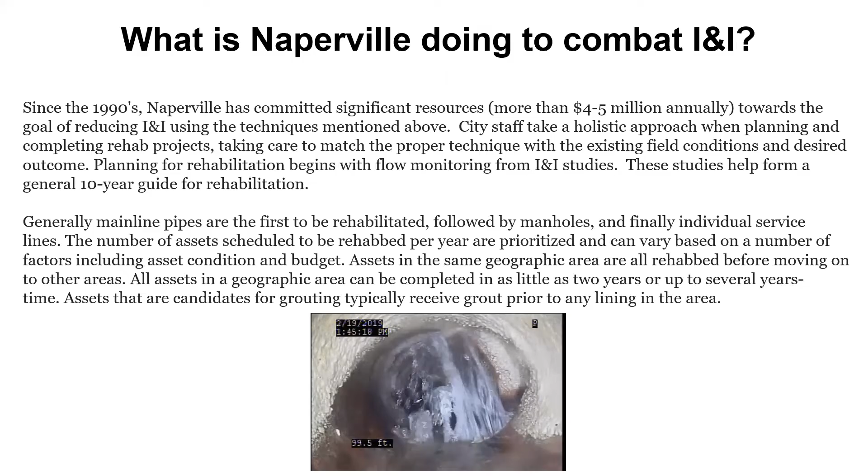From sanitary smoke testing, dye flooding, to MSI inspections - which MSI inspections is multi-sensor inspections on large sewer lines. Multi-sense meaning it uses CCTV, but it also uses sonar and laser LiDAR technologies to do a full inspection of the sanitary sewer line, including what debris is under the water flow. The laser measures the actual thickness of the pipe compared to what it was originally installed to what it is now. So we have an annual program that we do that on all of our trunk sewers.

And the one that we have the best success with, and I can't say enough about this program, is saturated ground inspections, where we actually go out and inspect our sewer mains, our manholes, and our laterals during saturated ground conditions. We found out this works out best for doing any sanitary sewer inspections because you're actually seeing what the sewer system is doing in real time.

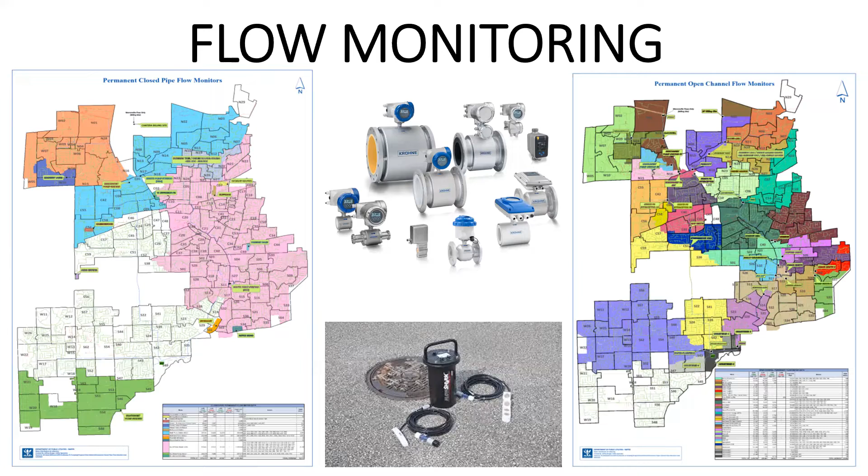The way it's worked, if you notice on both of these maps, each area is broken down into flow basins, and the flow basins are recorded in linear feet and acreage. This data is given to our flow monitoring data analysis company, and they use all of this data and our GIS tables to calculate rain derived I&I, or RDII.

We have a large network of SSO alarms, and the reason we have a large network of SSO alarms is that this helps us react to flooding quickly. There's 18 SSO alarms all over the collection system in low-lying areas or areas that we've known have issues in the past. This will help us react quicker to prevent any SSO overflows and help prevent basement backups - meaning we can get out there and bypass pump faster, or if there's something else going on in the system other than the rain, and it helps with our investigations also.

Tony, for those of us who are not working with the wastewater group, could you just describe what an SSO is? Oh, yes, of course, my bad.

The SSO alarm is a sanitary sewer overflow. And every sanitary sewer overflow actually needs to be recorded to the IEPA. So these alarms, these devices are level alarms that monitor just the level of wastewater in a trunk sewer and our interceptor. We have these alarms set up for the sanitary sewer overflows at different elevations. They'll tell us if the water gets to the crown of the pipe, that's when we start reacting. If the water continues to increase, we'll have a second alarm that's called a high alarm, kind of generic. But that's the point where we really need to start regrouping and figuring out what we're going to do to prevent any SSO, or sanitary sewer overflow.

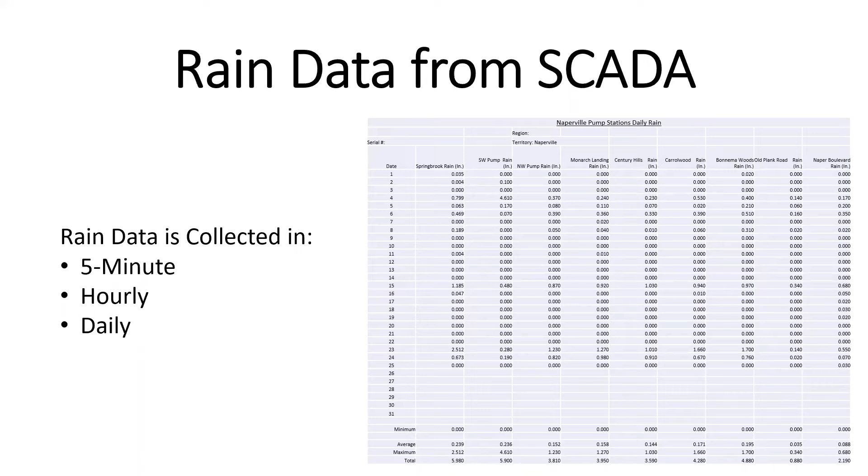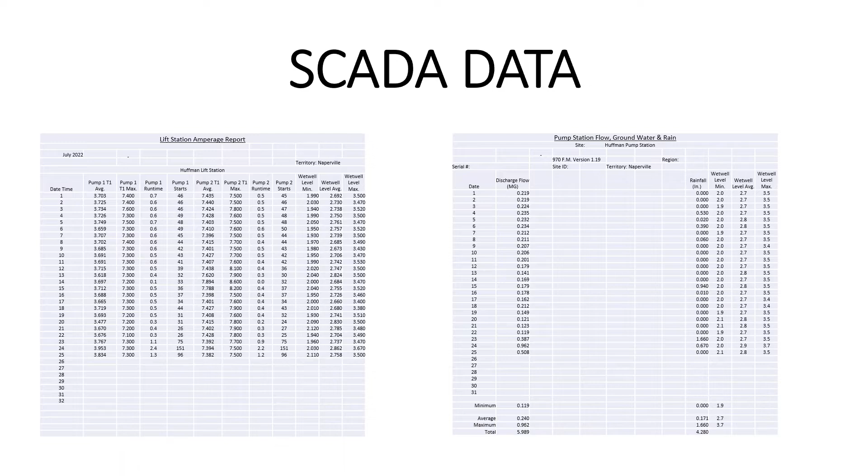Smoke testing is another great tool when you're doing I&I investigation work. The huge benefit of smoke testing is you can find a lot of defects fast in a large area. The way the city of Naperville does it, we'll do it in 3-year intervals based off our rain derived I&I reports. They break down what area flow basins are worse for peak base infiltration, and those are the areas we'll start doing all of our I&I investigation work at.

The smoke testing, we can cover the entire basin in 1 year, but we smoke test in 3-year intervals. The reason we do it in 3-year intervals is we find so many defects annually, we need to take a break from doing the investigation work so we can focus on doing the repairs.

We find a lot of service lateral leaks. We find a lot of sump pumps hooked up not properly, mainline leaks, manhole leaks, and also the biggest one we find is stormwater, storm systems that are not directly hooked to the wastewater system, but indirectly hooked up to the wastewater system.

A great example: we just completed 550,000 feet of smoke testing a couple weeks ago, finding 486 defects. A majority of them are lateral lines, areas that we know we're going to have to move our lateral rehab program to. We also found several stormwater catch basins that were smoking. They weren't directly connected to the sanitary sewer system, but indirectly connected through infiltration.

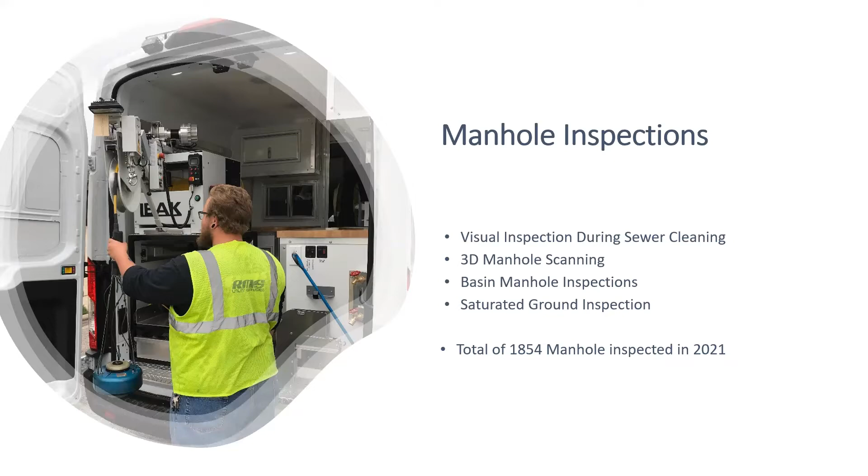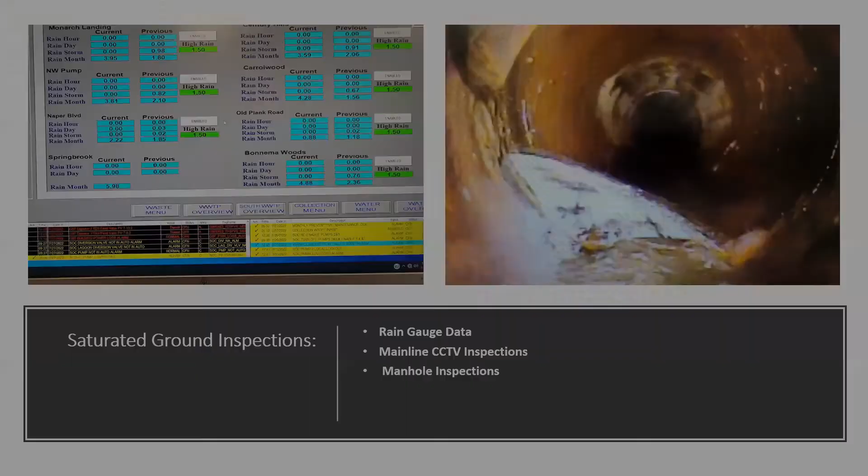What's working in the city of Naperville? The city is broken down into 172 wastewater flow basins. When we do I&I work and rehab work, we don't tackle what people call biggest bang for your buck, or fix the worst crack and then move somewhere else. It doesn't work, especially if you're trying to reduce your inflow and infiltration. It all has to do with water migration, which I'm going to talk about as we move on.

You can go out and fix a piece of pipe. That crack is fixed, but water is just going to migrate somewhere else. So when we do our I&I work and sanitary sewer rehab work, we actually rehab the entire basin to eliminate that issue of water migration. When I say the entire flow basin, I'm talking about lining main lines, lining laterals, manhole rehabilitation, mainline grouting, which I'll discuss further, and lateral grouting.

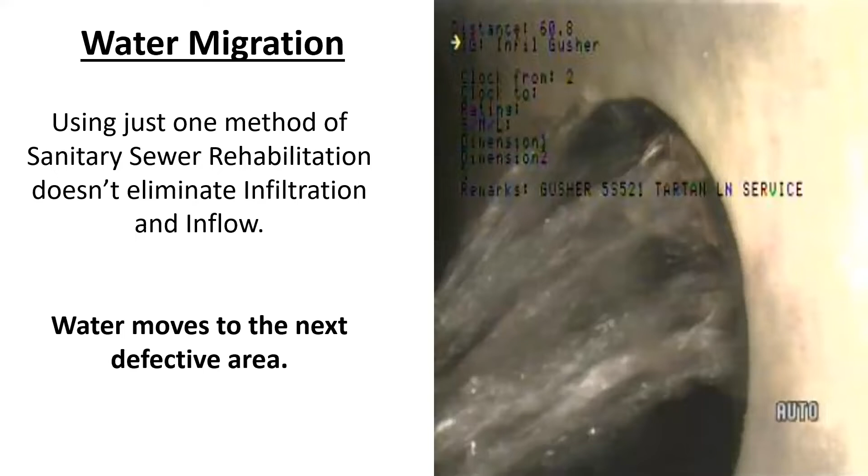Kind of already touched on water migration. People talk about just lining a sewer and say that will fix or eliminate their inflow and infiltration problems. Lining sewers does not eliminate or reduce the inflow and infiltration. All the water does is move somewhere else. That's why we address the entire flow basin.

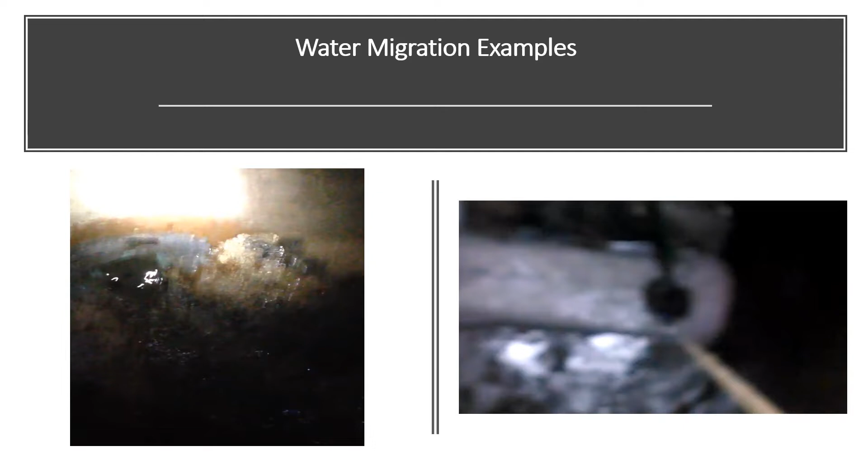These are great examples of what I'm talking about in water migration. This video here to the left, hopefully everybody can see it. This manhole never leaked before. We just lined a 36-inch trunk sewer. As the liner was exothermic, you could physically see the concrete changing colors from a light gray to a darker and darker gray until it came to a seam or an inlet. The water started pouring out of the seams and inlets that had never leaked before.

Same with this video here to the right. This is a 12-inch sewer main that we grouted after lining. You see all that water in there? That is all groundwater. Strictly, there is no wastewater intrusion in there, it's strictly groundwater. Every manhole, after we lined the sewer main, every manhole and/or lateral started leaking groundwater. So the water just migrated from one area to the next, and that's a prime example of why we address the entire flow basin.

Kind of touched on this a little bit already. These are the 4 main points of infiltration: defects in manholes, defects in sewer mains as number 2, number 3 is one of the big ones, where the service lateral from a house ties into the sewer main, and number 4, which a lot of municipalities for some reason hesitate to tackle, is leaks in a sanitary service line.

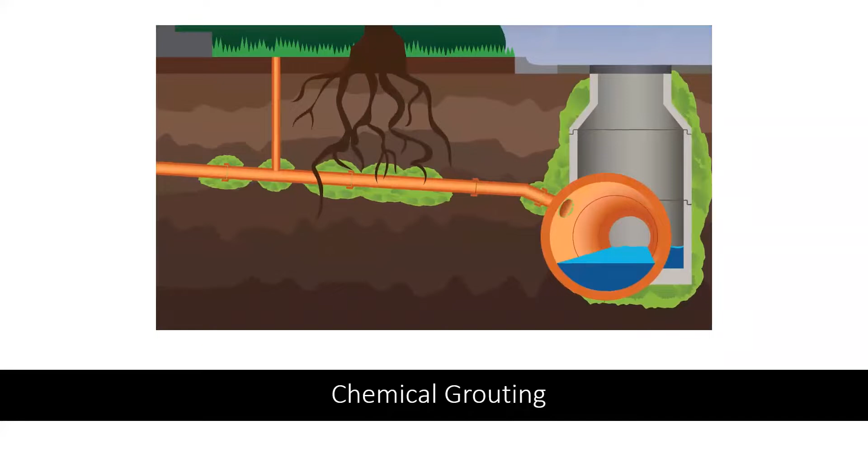Chemical grouting is a great tool to use for reduction of I&I. I got this video from my friends at NASSCO. It's not very long, but mainly what it shows is those 4 points of infiltration we've already discussed: the manholes, the mainline joints, the services, and it physically shows exactly what happens when you're doing chemical grouting. So jumping ahead a little bit, this was a great slide that tied in with the 4 points of infiltration, which we're going to discuss a little bit more.

From this point on, I'm going to start talking about the City of Naperville's rehabilitation program, and then after that, some great results we've achieved from our I&I work and rehabilitation work.

What's working in the City of Naperville? We'll start with manhole rehab. There are only 3 processes that the City of Naperville water utility accepts for manhole rehabilitation.

I don't want to name names, but in this case I'll name names: Raven 405, which is an epoxy spray-on liner; SpectraShield, which is a 3-part structural polyurea structural foam liner; and actually cured-in-place manhole liners.

The SpectraShield product, like I was talking about, is another great product that we've been using since 2013. We've had maybe a 1% failure rate, and again, this has a 10-year warranty. The company has come back and addressed issues with them.

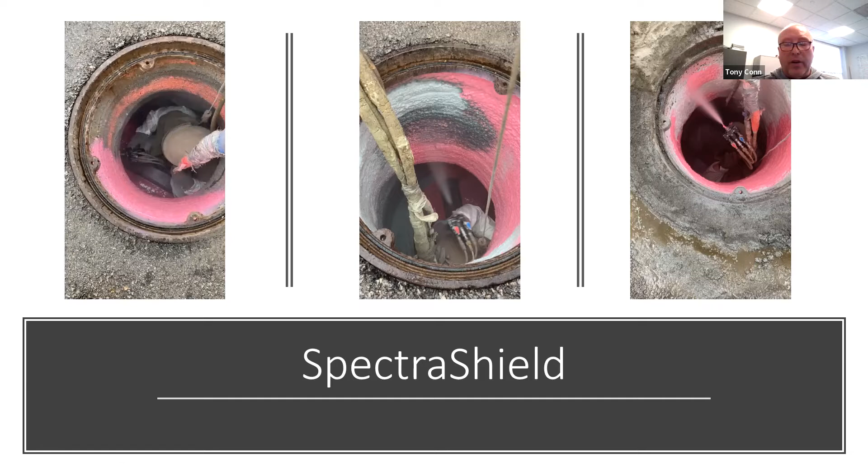The way it works is it's a three-part system: polyurea, structural foam, and then a protective layer of polyurea. This first application of polyurea is mainly just a primer to prepare the substrate for the structural liner that is being sprayed in this video.

It comes out to be actually 500 mils thick, so you lose a little bit of space in the manhole. In some cases it does get a little tight, but the benefits kind of outweigh the little bit of room you lose.

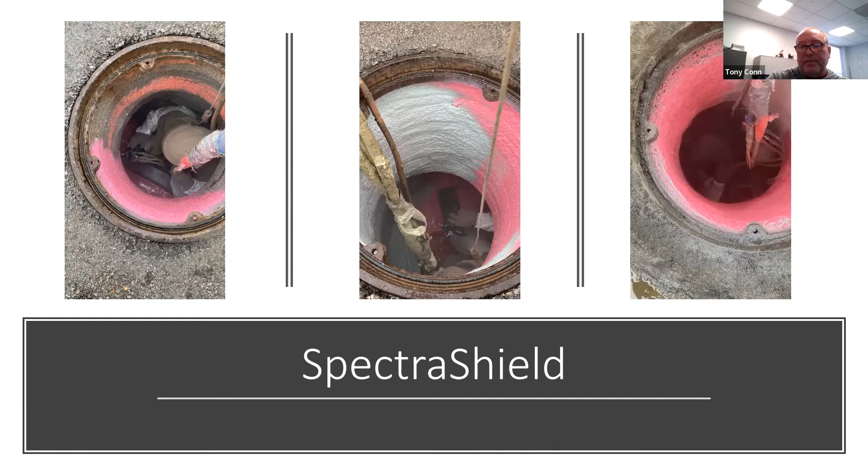This is actually the final application of polyurea—the protective layer being sprayed on the structural foam. Kind of touched on this already.

In the City of Naperville, if it's clay pipe, asbestos cement pipe (ACP), or truss pipe—truss pipe being a plastic honeycomb pipe with concrete embedded inside the honeycombs—if it's any of those three, it automatically gets slated to be lined with our cured-in-place liner.

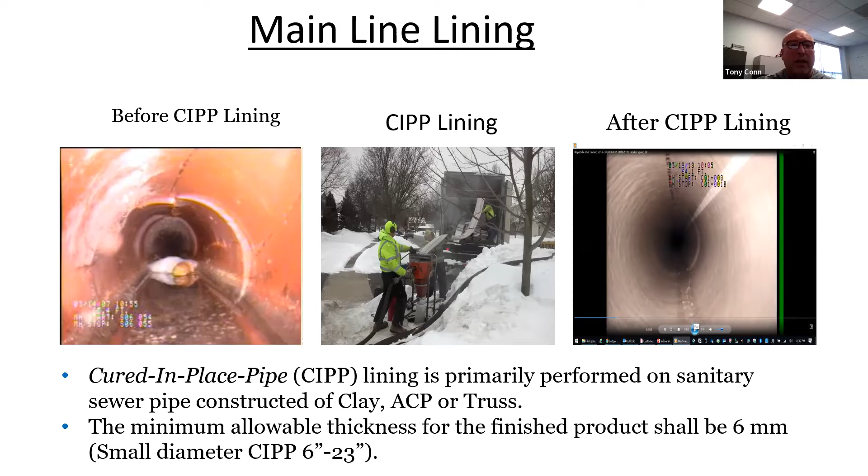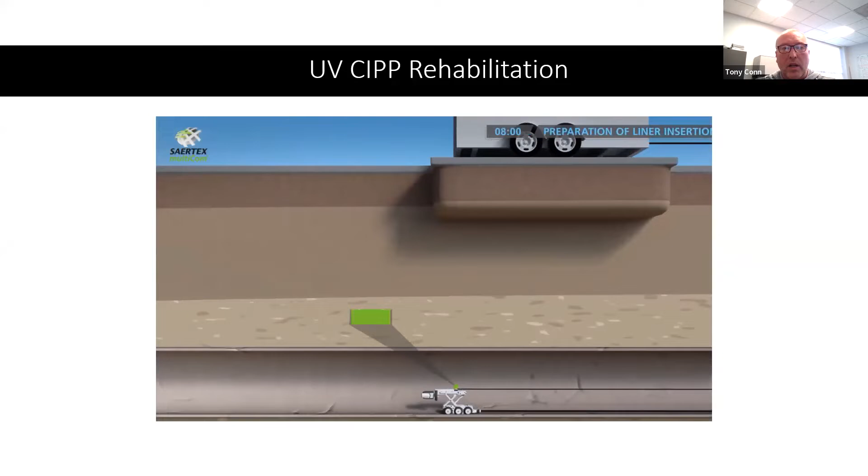With everything, they do a pre-video, which is required. The area is isolated, and they pull a pre-liner into place. The pre-liner mainly helps with small amounts of active infiltration and protects the liner as it's being pulled into place.

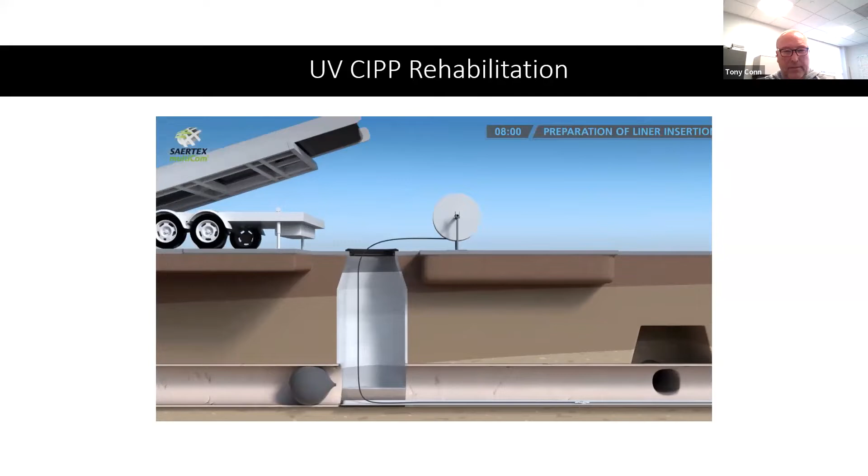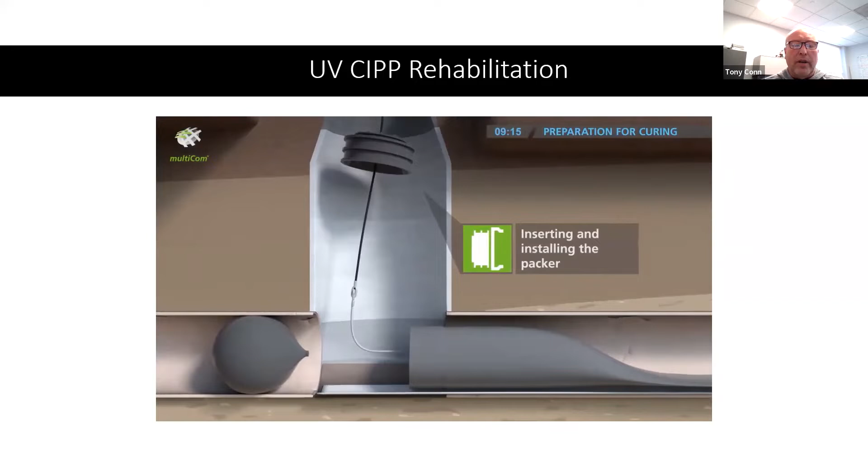The city of Naperville was one of the first communities in the Midwest to start installing the UV process in sanitary sewers. We did this in 2008 with Saertex, completing 485 feet with 14 laterals. There were some learning processes that were discovered and needed to be addressed during that project.

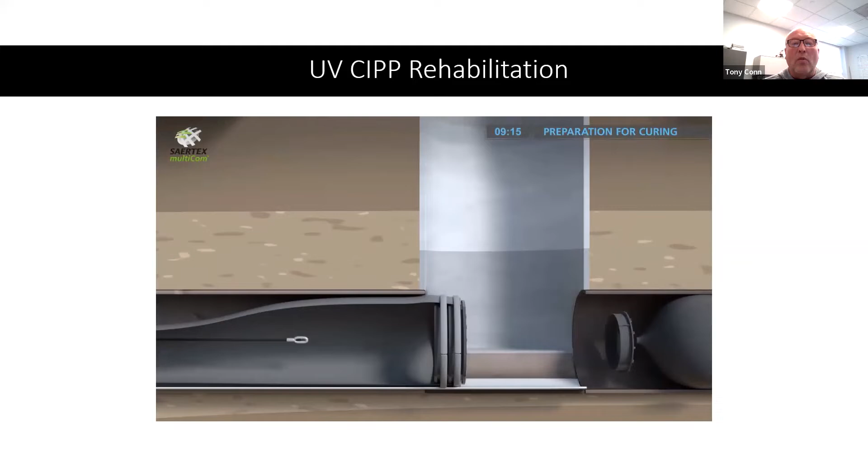Over the years it's actually been extremely fine-tuned, and the environmental benefits of UV cured-in-place liners are tremendous compared to the traditional felt impregnated liners.

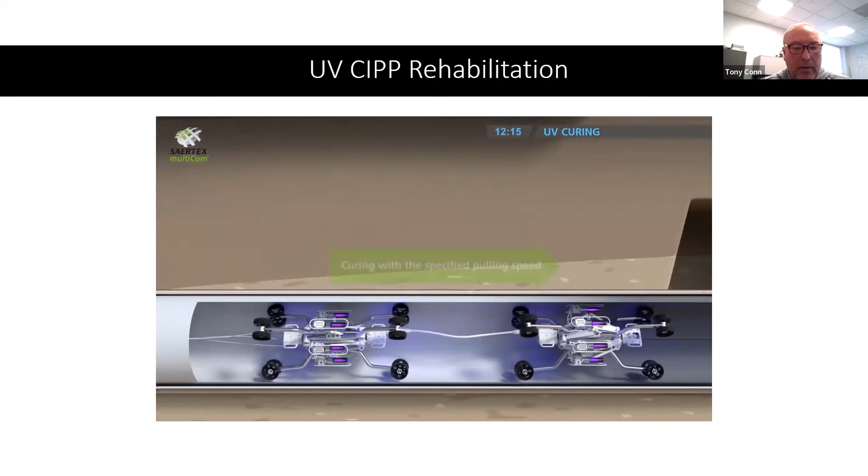So the liner's been installed, the ends are on, and this is actually the light train, the UV light train being pulled to the end. The bag is inflated to 5 to 8 pounds to hold it tight up against the host pipe, and now the UV light train is being pulled through, curing the liner in place.

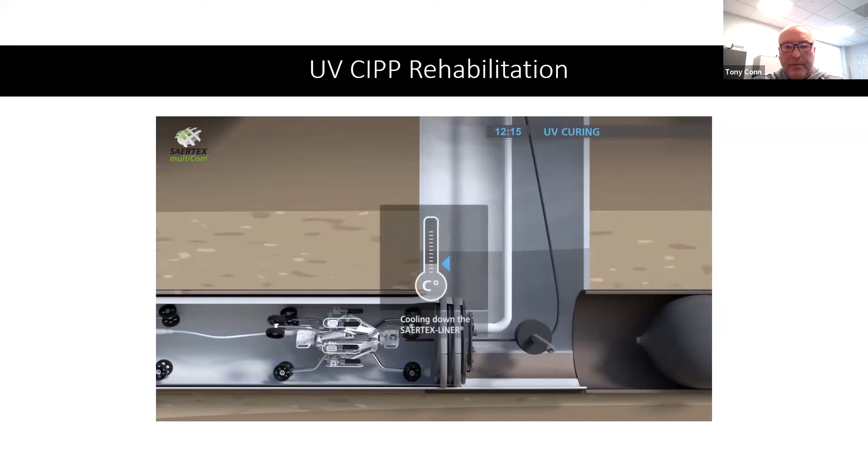Chemical grouting and CIPP - we started using both processes a few years ago to help eliminate I&I, especially in trunk sewers and interceptors. Before we install a liner, we'll go through and grout every single joint in that trunk sewer or interceptor before the CIPP liner is installed, to eliminate any additional I&I. It also prevents resin washout, so we have a top-notch quality product being installed.

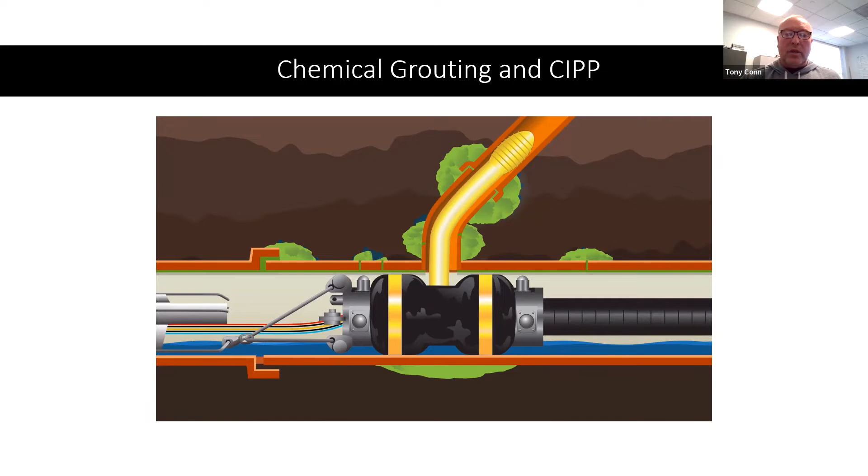NASSCO, the North American Society of Sanitary Sewer Companies, has the standards for chemical grouting and CIPP liners. They'll hold the air pressure for a certain amount of time. If it fails an air test, we'll go ahead and start pumping grout until it passes. If it fails, you know you have an infiltration or inflow problem at that piece of pipe. So they'll go out and chemical grout every joint and every lateral before and after the main line is lined.

Service lateral lining - City of Naperville currently is using the LMK T-Liner. Reason being, in our bid specification, we require a full circumference liner at the sanitary sewer main. We've lined them from 2 feet all the way up to about 183 feet with this T-liner process. That is what's considered our full T-liner.

We've also had incidences where we have to use a shorty liner or stub liner, meaning shorter shots. The way it works is the contractor will come out, TV from inside the sewer main, the service lateral, check its condition, and do the locates. After everything is located, another crew will come back and install what's called a vacuum - they'll hydro excavate down over the top of the lateral, install a vacuum clean out, and then the liner can be installed from the sanitary sewer main up to that clean out.

That's a great process. The reason you need the clean out is to make it easier to clean the lateral from the clean out than from the main line. Both processes are used, but as the liner is being installed from the main, they use a service camera to watch the liner as it's being unfolded to make sure there are no defects, and then they watch the process as it's being cured.

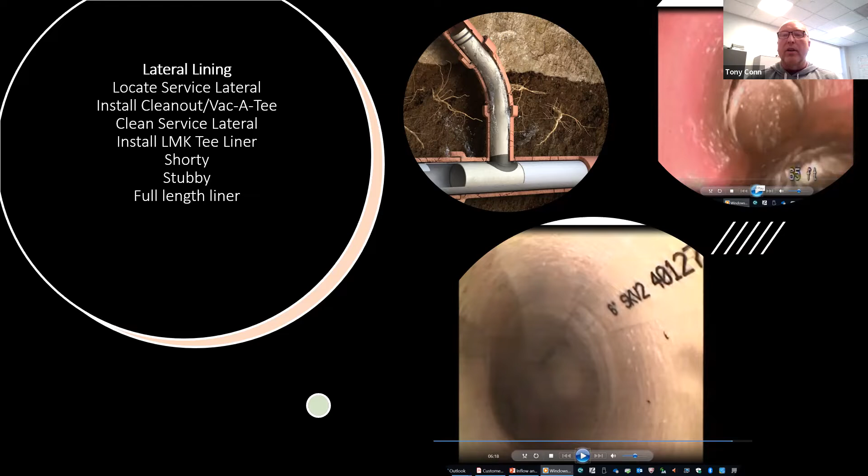This is just a real quick video of the CIPP liner being prepared to be installed. The video playing right now shows how the liner is impregnated with the polyester or epoxy resin, depending on what your bid specification says.

This is actually the liner being installed into the launcher. That is Dawn liquid soap - that's the only thing that most liner companies use nowadays. It's a lot more environmentally friendly than the oils and other substances that were used back in the day.

And this video shows the liner being installed, the launcher being installed into the main line, getting ready to be pulled into place so the liner can be launched up the lateral that you're working on.

These videos show, like I was telling you about, why they have the vacuum. The video to the right is the contractor telling the operator of the launcher where exactly to position it so the bladder can go up the lateral.

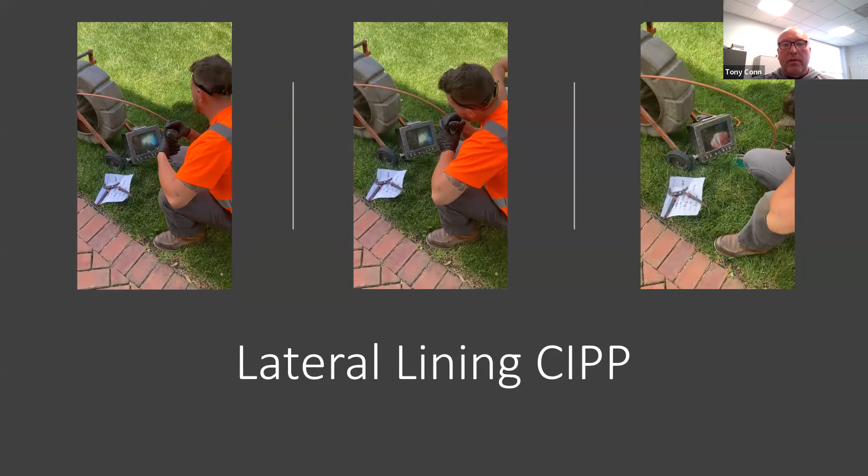These two videos are just showing the liner coming out. They're not the greatest, but they're the best ones I can get. I thought they were a great example showing how the liner was actually pushed out of the launcher and up the lateral into place.

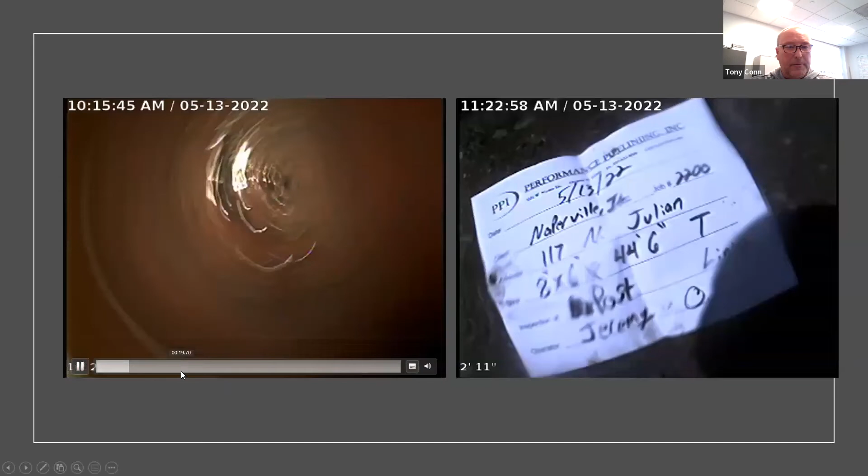These are before and after videos. I'm not sure how fast these are. The one playing now is the before, what the clay service looked like before it was lined.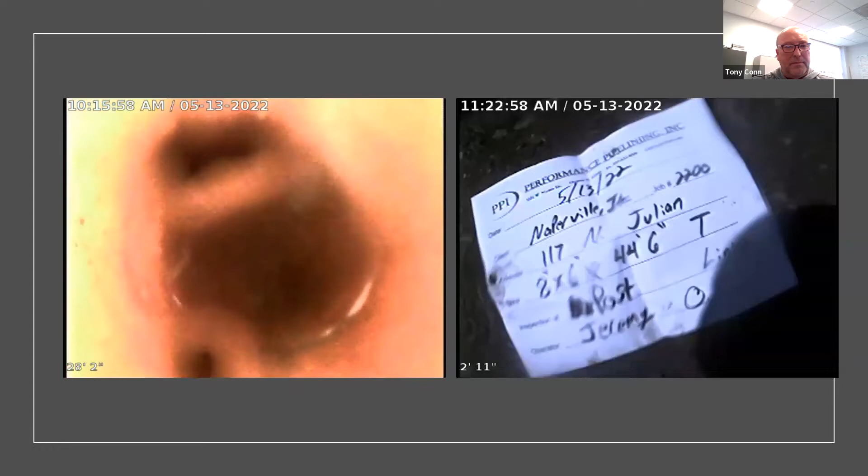In the video to the left, it's mainly showing what the lateral looks like after it was lined.

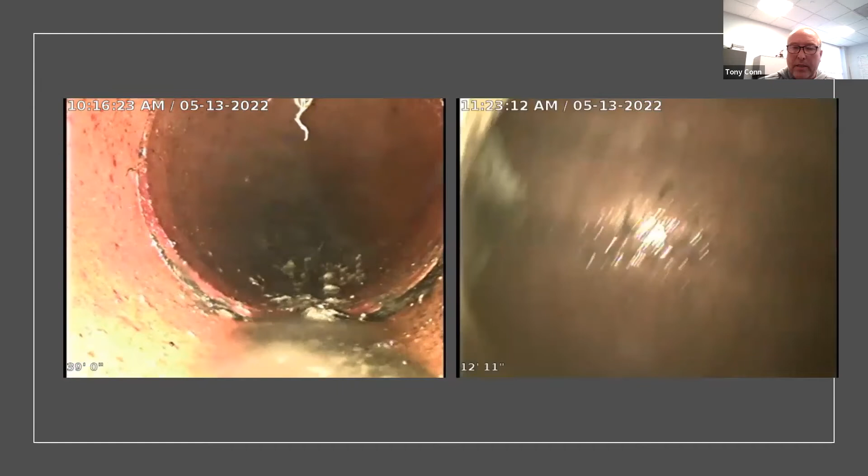Again, everything is done through that clean out that was installed. And again, can't say it enough, the vacuum process is done when you're doing full length liners. So if you're doing anything longer than 10 feet, you're going to end up having to install a vacuum.

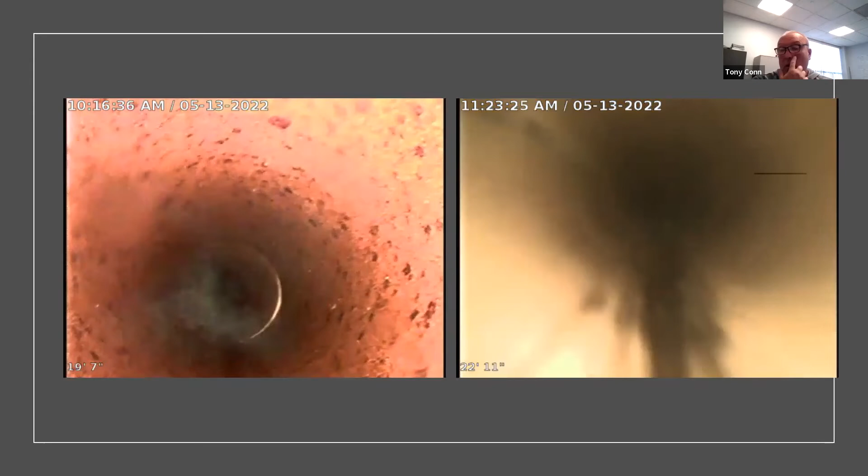One thing I wanted to note on the lateral lining that didn't show in this video is every single liner is marked. The address of the liner, the length of the liner, and the date the liner was installed.

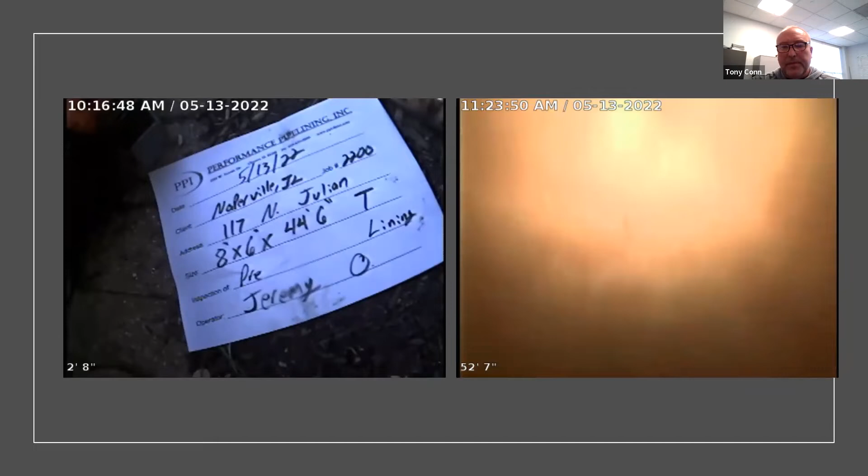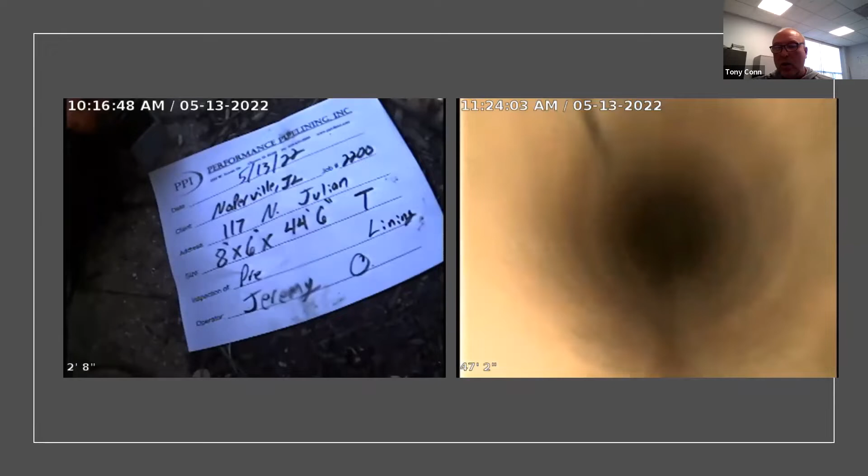So that's a great video showing how the liner is installed and what the final product looks like, all the way from the clean out to the city main, including the T-liner that does the full circumference of the city main.

Mainline lateral grouting, kind of touched on already. The city of Naperville, in certain areas, chemical grouts quite a few services, about 150 services a year with just chemical grout. The chemical grouting has been great success, which I'm going to talk a little bit further on as we start talking about the results of our programs.

The process of lateral grouting: when the city of Naperville does lateral grouting, meaning the sewer line from the house to the city main, we will install a vacuum, same exact process as the lateral lining, but we will actually chemical grout the entire service from the mainline connection all the way up to the foundation of the house. The clean out is installed, again, the same process as the lateral lining.

Contractor will come in and grout the mainline portion first, as shown in that one video. Then from the clean out, they use what's called a push packer. They will chemically grout every single joint from the clean out to the main, pull that push packer out, flip it around, and go from the clean out all the way up to the foundation of the house.

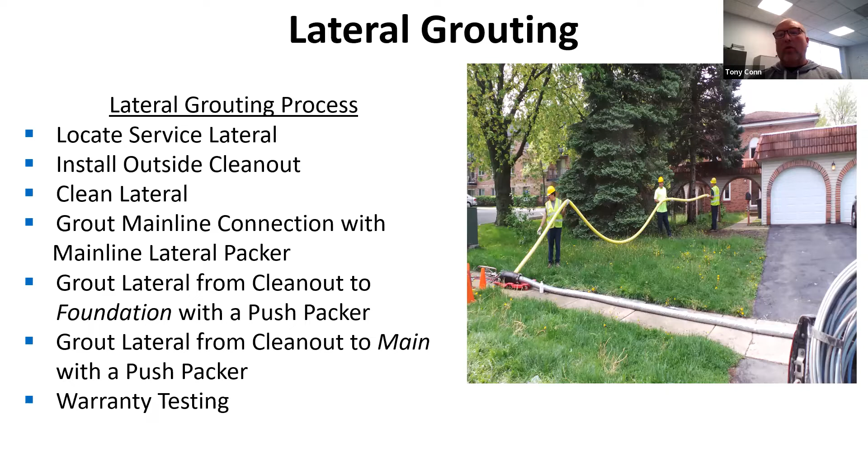So one thing I want to mention is the warranty testing. Every time we do a chemical grout, everything has to have an 11th-month warranty at no charge. Warranty testing is done on 20% of all the chemical grout installed at no cost to the city of Naperville. So that's worked out really well for us.

So those are a very, very quick view of what the city of Naperville is doing on sanitary rehabilitation. Now, I can talk for months about this stuff, but also keep in mind, for a very good sanitary rehabilitation and I&I reduction program, if you're not doing the inspections, you're not doing your users, yourself, the owners, justice.

Great example, manhole rehab. There should be an inspector, whoever you are, if you're a municipality, a sanitary district, whoever is paying somebody to do the work, you should have an inspector out there watching every process being done. You don't have to watch stuff cure, it's like watching grass grow, but mainly watch the prep work, especially with manhole rehab.

Prep work is probably the most important key portion of doing manhole rehab. If the prep work is not done correctly, the product is going to fail. I don't care what the product is, I don't care what the salesman says. If your prep work is not done properly, the manhole rehab product does not have a good substrate to adhere to, and it's just going to fail prematurely.

In the city of Naperville, when we do our manhole rehab, there is a form for every process that we use that is filled out. There's an inspector out during the prep work. Besides watching them do the prep work, they also inspect all the equipment to make sure it's working properly. If there's any chemical grouting done, they'll fill out a separate form for the chemical grouting.

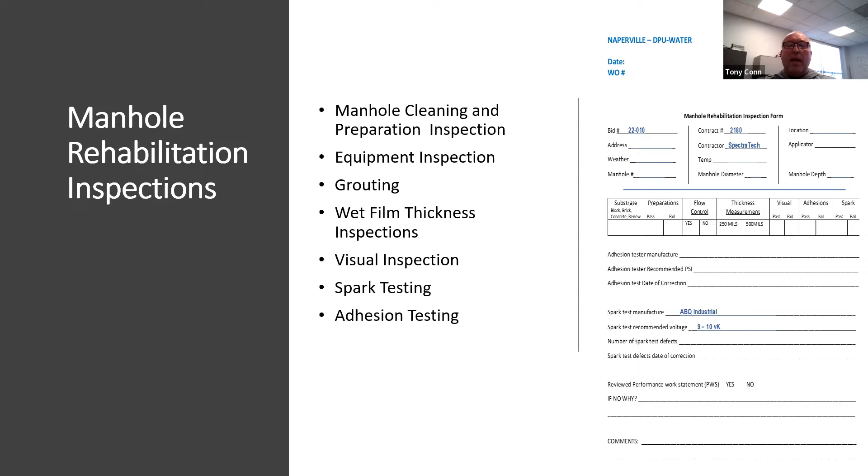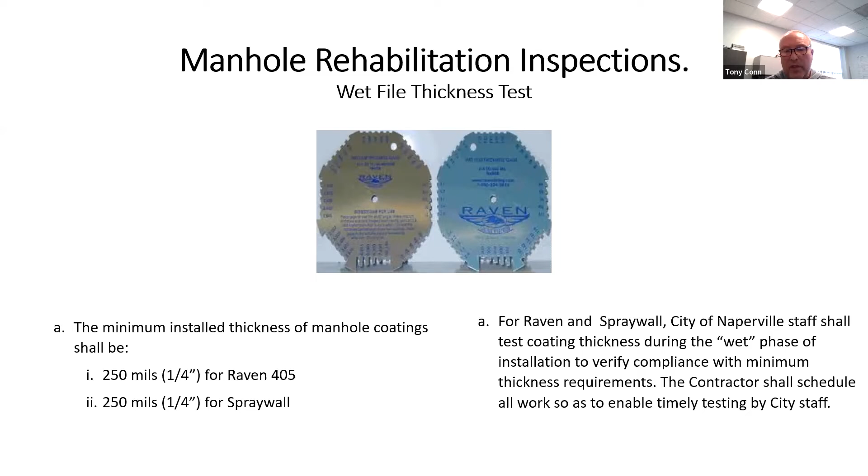The wet film thickness test is done by a city of Naperville representative, where they will go into the manhole, or have the contractor measure the exact thickness in certain areas all over the manhole. With a thickness gauge, the contractor has to physically measure the thickness of the epoxy and/or polyurea they're applying, make sure it meets the bid specification, and show that measurement to the city of Naperville representative.

Spark testing, or a holiday test, is great for finding defects. You'll see certain things during visual inspection, and certain things with wet thickness testing, but you're not going to see every single pinhole. A spark test sends an electrical voltage through the finished product, and if you see any arcing, small arcs on any portion of the liner and/or epoxy being sprayed, there's a pinhole there. That's the reason why it's there.

They'll do a spark test depending on the voltage required, which goes all the way up to 25,000 volts, depending on what ASTM standard you're using. So this is a holiday test being done. It's just a wire brush that has electrical current running through it. I don't know if you saw that arc there.

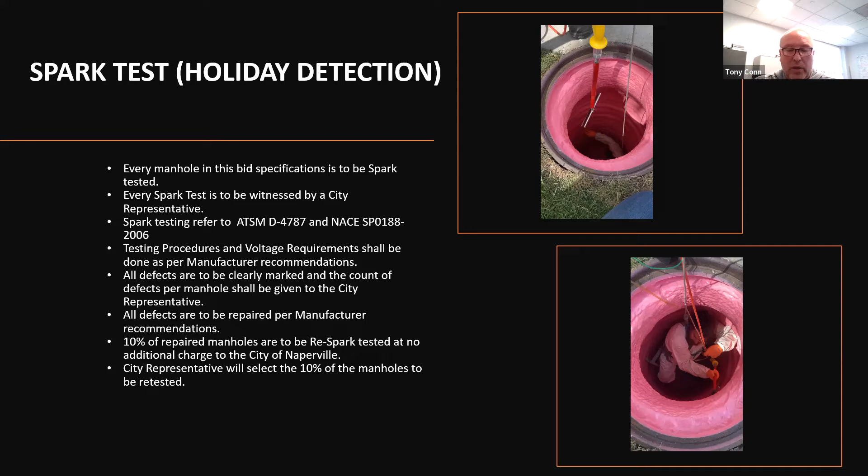The inspector just moves the brush across while the electrical voltage is going through it. Any pinhole and/or defect will show an arc, indicating a defect in that liner. They'll circle it with a permanent marker and come back at a later date to fix every single one of those pinholes, and then they have to redo the holiday test all over again.

The same thing applies to adhesion tests, especially if you're doing epoxies. You should do an adhesion test. I know it kind of damages the liner, but that should be written in the bid specification. After the adhesion test, the contractor has to come back and fix it.

An adhesion test involves gluing a dolly to the epoxy. A hydraulic unit is hooked up to that dolly the following day, and at a certain pounds per square inch, they apply hydraulic pressure. If the liner pulls off and the substrate doesn't, the liner didn't adhere, it's a fail. If the liner and the substrate come off together, the substrate failed, meaning the liner actually adhered to the substrate, and that's a pass. All of these inspections are done on every single manhole rehab project.

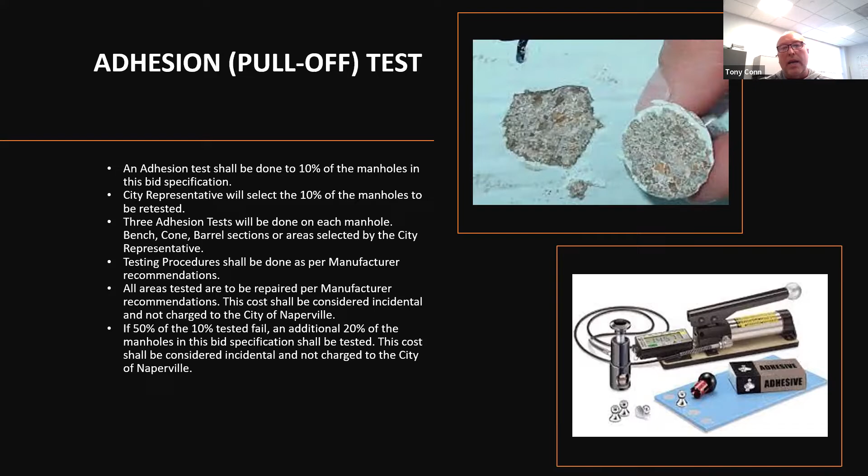Mainline cure-in-place liner inspections are the same thing. There are forms filled out, and the inspector actually goes to the wet out facility. Depending on who the lining company is, we have to go out and witness our liners being wet out. The inspectors also inspect traffic control, do site inspections, bypass pumping inspections, and visual liner inspections, meaning checking the liner as it comes out of the reefer truck and is installed through the shooters.

Our inspectors actually watch the liner being pulled through to make sure there are no defects that happened while they were shipping and/or packing the liner inside the truck.

Every CIP lining company is required to give us all of their curing reports, and the curing reports have to have temperatures, times, sample locations, mill thicknesses, and a lot more other information. Also, every cured in place mainline project that we do, we require them to supply us 10 live samples. There's not a whole lot of time for me to talk about how we do the samples, but if somebody has any questions, I'd be happy to discuss that with you.

And then video inspections - a lot of this can take a lot of time, I just threw it on here. If you look at the ASTM, you do a pre and a post. City of Naperville, we do a middle inspection before any service laterals are reinstated, and then the post.

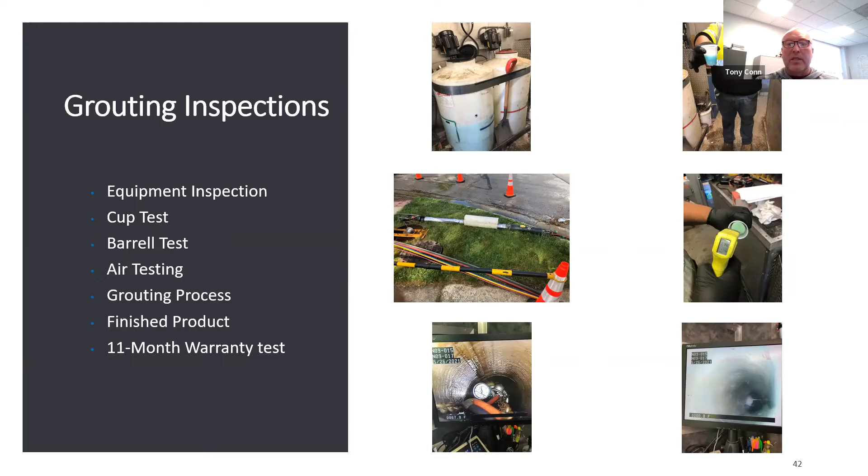These are the forms that are filled out for chemical grouting, and these are the forms that are filled out for the lateral lining.

Communication is a great way for your project to be successful and to have a long running project. Communication is key - we take a lot of time on every single project we do, not just for the year, but every project. We communicate to the public what we're doing, why we're doing it, and the benefits to both the public and private side. We talk to homeowners associations, we physically go door to door and talk to homeowners, leave letters to every single homeowner, and besides that, talk to our management and city councils, telling them these are the benefits from our programs.

This is just a quick map of some of the processes. There's a map made like this for every single sanitary sewer rehab or I&I program. This one happens to be the lateral grouting we're doing in a subdivision in Cress Creek. It shows the laterals that need to be grouted, what type of grout is done, and where we are on that process. These maps get updated every Monday morning.

Results of the city of Naperville's I&I - we've had some great results with our I&I work. These graphs mainly show the 4 areas that we've been working in over the years: Burning Tree, Hobson Mill, Prescott, and Riverview. These are all flow basin areas, that's where the flow meters are. Riverview includes the city of Naperville's downtown area. The column all the way to the right shows how much reduction, I&I peak reduction, has been done in these flow areas due to our I&I investigation and sanitary sewer rehab program.

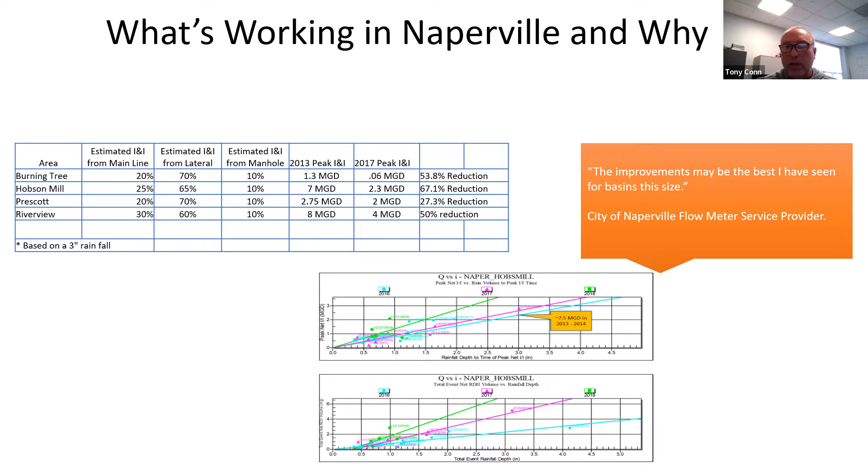The statement here is from an engineer that I have a lot of respect for, who works for a company, pretty much saying that this is the best flow reduction he's ever seen in a flow area in his 32 years of doing data analysis. So I take that with a lot of pride.

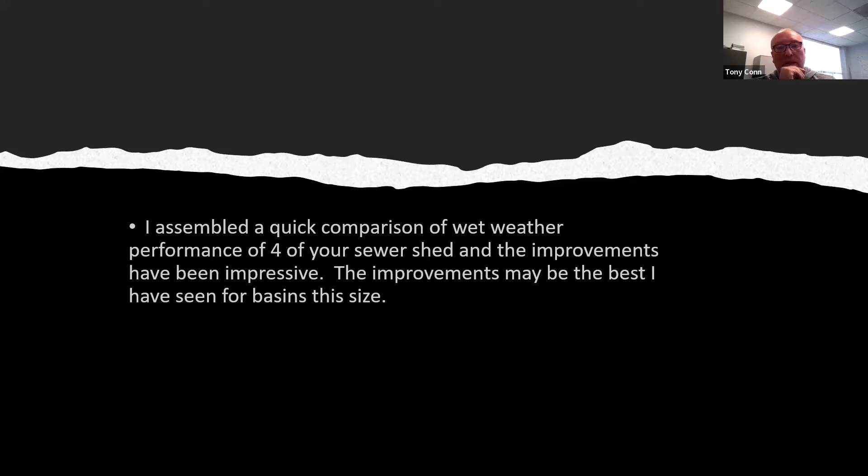Again, this is the same engineer. I assembled a quick comparison of the wet weather performance of 4 of your sewer shed, and the improvements have been impressive. The improvements may be the best I have seen in basins of this size.

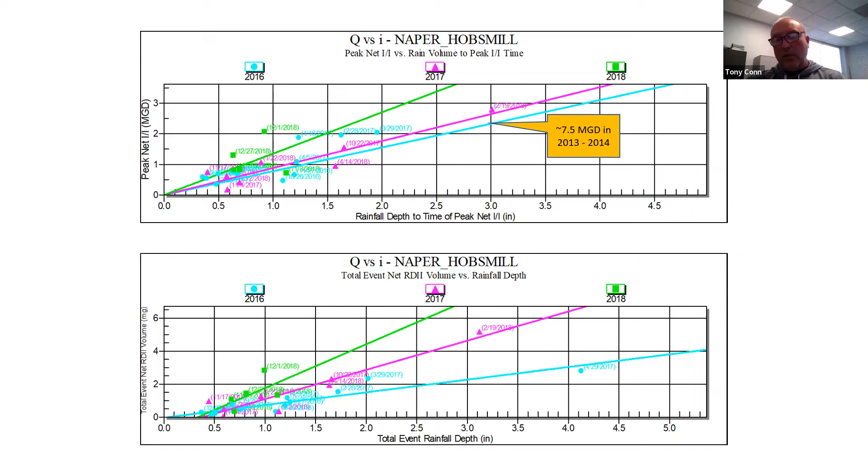This is just another slide that we've been advertising the heck out of - City of Naperville's results system-wide. The orange line shows our current influent from our wastewater treatment plant. The green line shows what our flow would be if we weren't doing any I&I work. And the blue columns are actually our population. So in a really quick glance, you can see our population continues to grow, but our flows keep going down, down, and down.

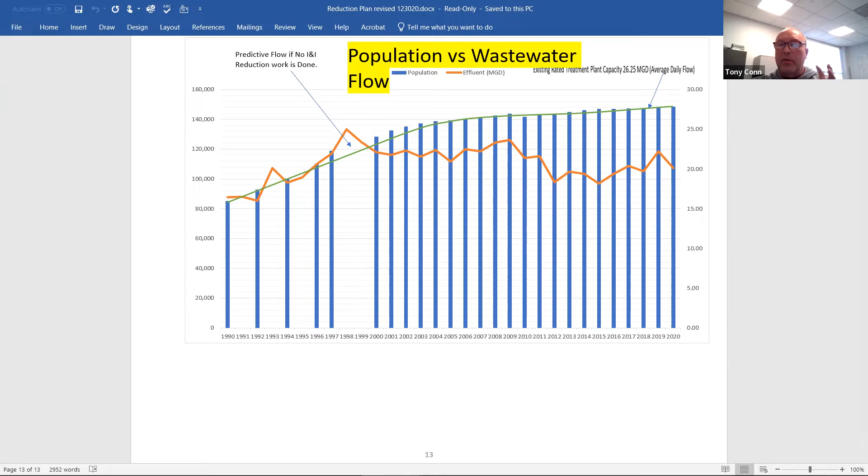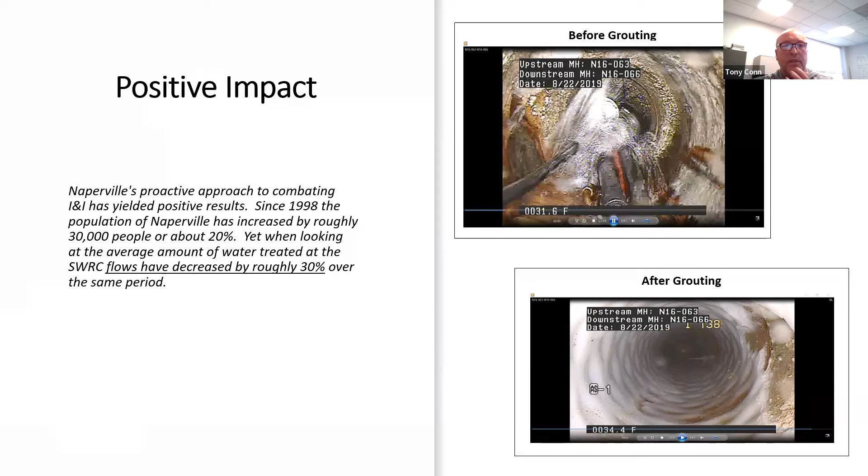Positive impact - this is again just a copy of the slide that was on the City of Naperville's website. I don't want to spend too much time on that. Some of the results from our I&I sewer rehab - other than that, a lot of people focus on when they're doing I&I work or rehab work, they mainly focus on not having as many wastewater backups, or the flow to the treatment plant going down. But they forget about all the other stuff, especially maintenance costs and all the savings you have there.

A great example is our customer service calls. In 2007, we had 600 customer service calls, meaning we had to send a crew out to respond to all of those calls. In 2019, we only had 295 calls - saving quite a bit of money.

Sewer maintenance costs - areas that we've had to root cut every single year with a root saw, our jet flushing trucks now are down to, we only have to flush them once every 4 years, saving a large amount of money annually.

Reduced chance - this is one that a lot of people don't even take into consideration - is the safety. The money you save by people not getting hurt. If you go back to what I was talking about on reduced sewer costs, instead of root cutting every year, that same area we're now only jet flushing every 4 years. Think about it - there's a lot less manhole covers these guys have to lift. 80-pound manhole covers, lifting every day equals shoulder injuries. So these shoulder and back injuries being prevented - the safety alone almost pays for the rehab process.

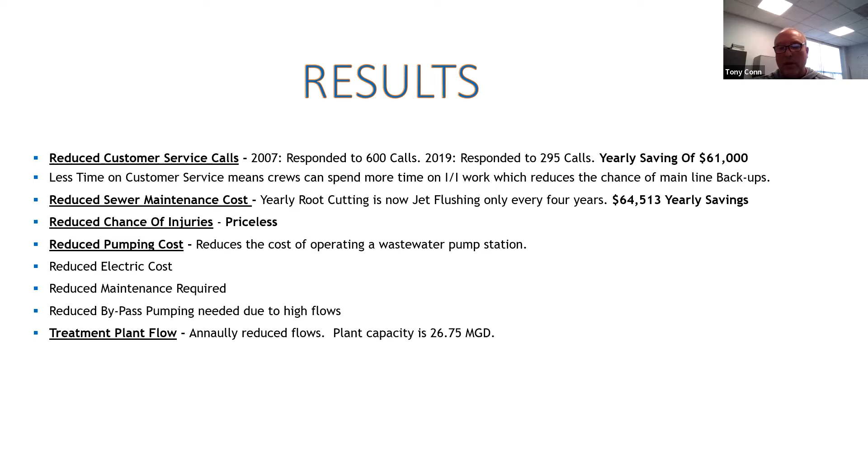Reduced pumping costs at wastewater pump stations - if we're knocking the flow down, we're using a lot less electricity, not having to do as much maintenance. During high flows, we're not sending crews out to bypass pump around those pump stations because they can't handle flows. And the normal annual flows to your wastewater treatment plant goes down. I don't talk about that one too much because that's like the cliche. I like to focus on this: you're not just saving money by reducing flow to your treatment plant - all these other maintenance items alone save so much money.

The results are tremendous. Our CMOM program - capacity management operation and maintenance - is actually required by our IEPA permit.

This is updated annually and given to the IEPA every January. It's a full breakdown of our collection system maintenance program, and it's also part of Naperville's permit with the IEPA. We're required to supply them a 10-year I&I program and an annual status report, which we try to get to them by December 31st of every year. Both of these are on the City of Naperville's website if anybody wants to look at them.

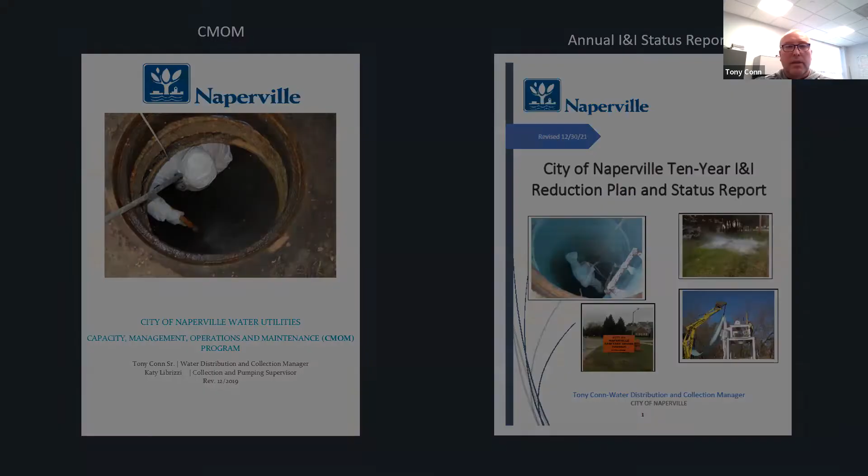I apologize for my long-windedness about all of this stuff. I'm very passionate about it, and I could spend months or weeks talking about it. If there are any questions, here's my contact information.

So Stephen, it's all you. Yeah, that was great. I'm currently working on rehabbing my rental property, and I'm never going to complain about all the maintenance work I need there again.

Tony, we had a question from one of the municipal members suggesting you might want to share this presentation with other municipal members, since a lot of what you're addressing is things they have in common. They also asked: have any of the lessons learned from this process been applied back into your capital improvement or permitting? For example, the minimum diameter of your manholes—are new manholes being resized to take into account what you've learned from the upkeep?

To answer that question, we haven't had to change the size of our manholes for upkeep. Our standard manhole is 48 inches in diameter, but we also install other processes while that manhole is being installed to prevent any infiltration issues and H2S issues.

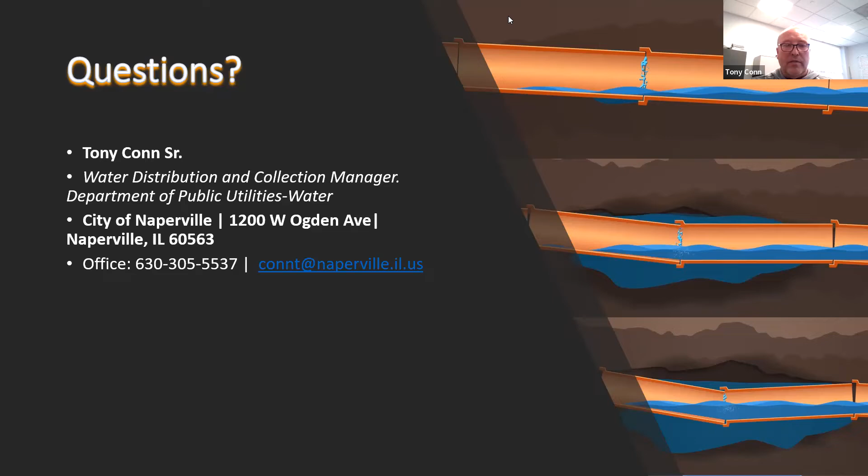Tony, I know for one, I'll give more thought to grouting. So I think we can do more in our program here. We appreciate it. You're welcome. Thank you. Take care, everybody. Good. Thanks, Tony. All right, so we'll start the business portion of our meeting.

Next is discussion about our NPDES permit special conditions. At the end of September, we held a meeting for the special assessment permit holders. These are wastewater treatment facilities. As you know, they've offset phosphorus removal during the last period and pay into a fund that then funds all of the physical projects that Dina and I will be talking about in a few minutes.

What we're talking about here is, as this moves into its fourth phase, we are putting together this nutrient implementation plan for all of the wastewater treatment facilities in the member area, both the DRSCW and the lower DuPage. We had to talk about the modeling that we had a presentation on a few months ago, and what the ambient, in-stream targets are for phosphorus and how we would get there.

We had a lot of discussion about those items, and what we're currently working on is a fully fleshed out proposal for what exactly the target would be, and what our estimated costs and any assessments that would go along with it would be. I was hoping to get that to members last week. I still haven't quite finalized it, but we should be getting it to the treatment plant community next week, I'm hoping.

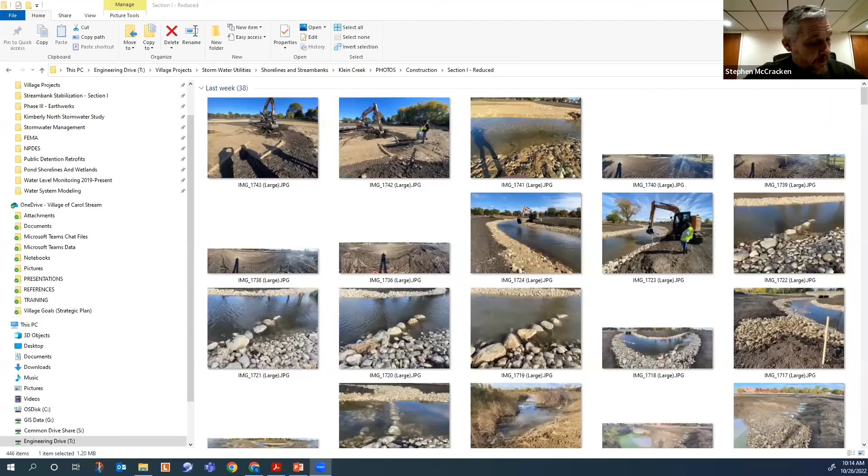So we have an update now on our ongoing Klein Creek Streambank Stabilization project, which is also a project in our permit. This is a project between DRSCW and the Village of Carol Stream, and we've got a brief presentation about the ongoing construction activities at the site. Greg Ulreich with the Village of Carol Stream is going to take us through it.

Hey Greg. Hey Stephen, how's it going? So yes, I will do my best to keep it brief, but I am excited about it. I put a lot of work into this little presentation here, so I'll move fast, Stephen. Well, yeah, we're good, so go through it thoroughly.

All right, so we call it Section 1, and it got split up when the DRSCW agreed to fund half of it. The other half is IEPA 319 funded, so we have 1A and 1B. 1A is this Klein Creek section, it starts from the top and flows to the bottom. We're talking about the red and yellow section as one, but as of last week we've pretty much completed Section 1A, which is what was funded by the DRSCW.

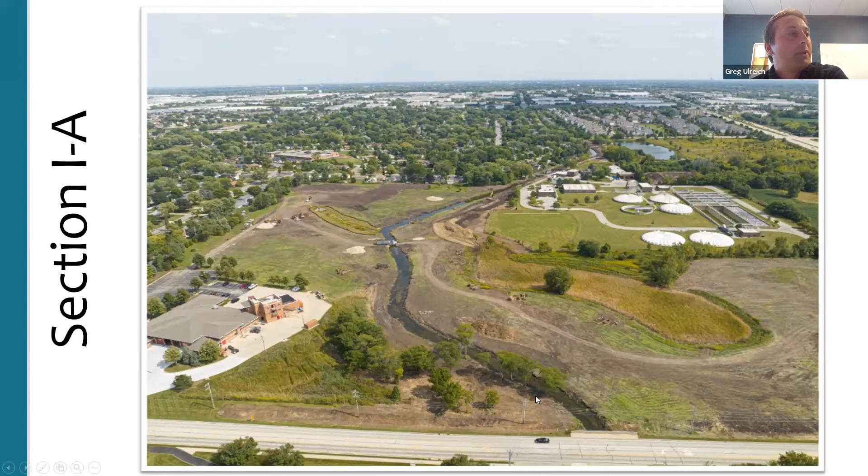So that's good news, and I want to share some of the construction details. This is Conn Road in the foreground and our wastewater treatment plant in the background, and over to the left is the fire station. This is the creek after the trees were removed, and the diversion channel is getting put in place in the background. All this open space you see, all the way up to the residential properties and the turf grass and the wastewater treatment plant, will all be replanted with native vegetation.

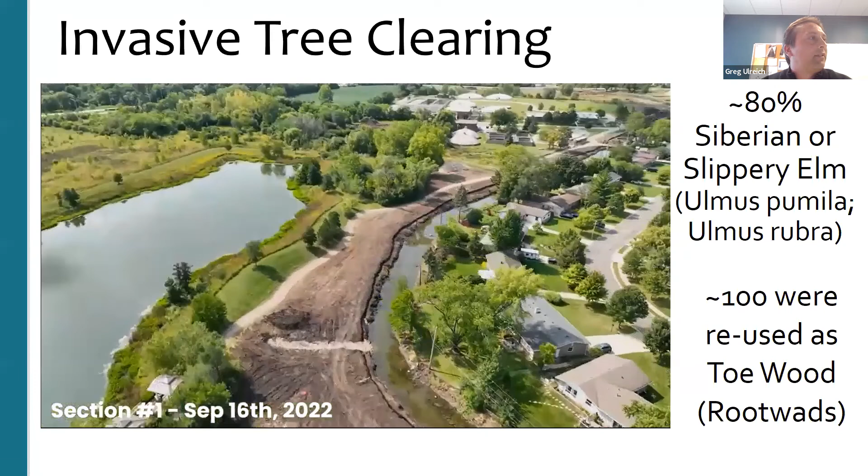So then moving on is the drone footage that we got done, which is kind of cool stuff that takes us through both sections here. This was right after all the trees were removed. This is upstream, moving downstream, this is the section funded by the IEPA. You see this bridge here, and just after that is the wastewater treatment plant's outfall, and then we start into the DRSCW section.

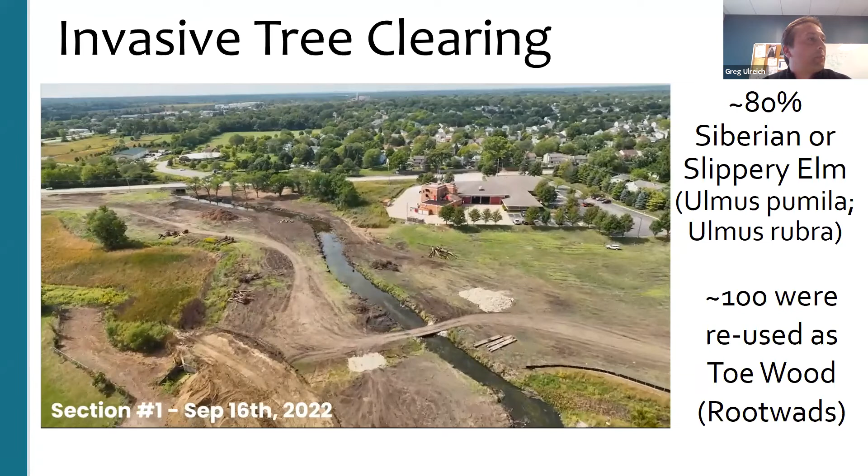We've got a temporary bridge there for access, and this is the downstream end of the DRSCW section. And then looking upstream now, there's our diversion channel that's being constructed, and we're back to the upstream section. I'll stop it there and we'll just move on.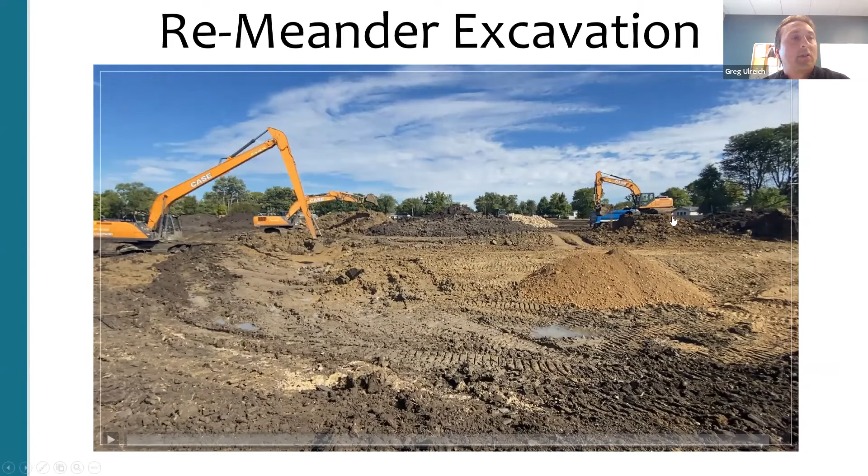This is the construction of the remeander that we are doing. So the existing stream bed is behind me, and these guys are carving out what will become the new stream bed. You've got the stream bed material in the lower right foreground, and then you've got a couple excavators working, and then they're hauling off to another location on site, which is where all the dirt is being dumped.

So this is the toe wood going in. We had about 100 trees that were removed and put back in as toe wood. Most of them were where it was dug out, trenched behind, and we get about 10 or 15 feet of log. When they could, they embedded it into the bank, but most of them were just laid down. There's a footer log that you can see in this upper video here, and that's what they all rest on. Then there's some backfill of rock.

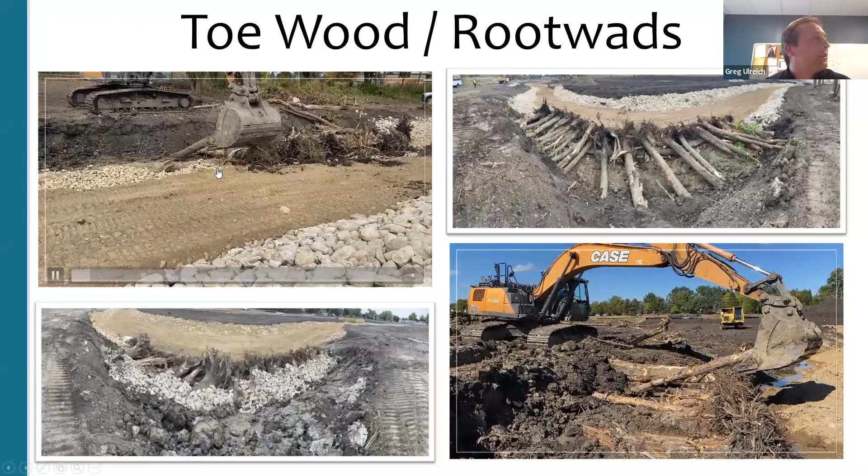I'll skip to the next part where we do some rock filling here. So the first layer is the bigger rock, cobblestone, the same size that goes on the stream bed for stabilization. And then we had some mixing in of the more sandy, finer material, with sand being the smallest that it gets, and that'll fill in all the voids there. So everything is pretty much rock as backfill.

In the background you can see Stephen and Eric Knighty and Aaron Pandy, who came out to witness this in the beginning and provide some great direction to Earthworks, who was doing the construction. They made some minor adjustments, and hopefully we have a product that is going to last.

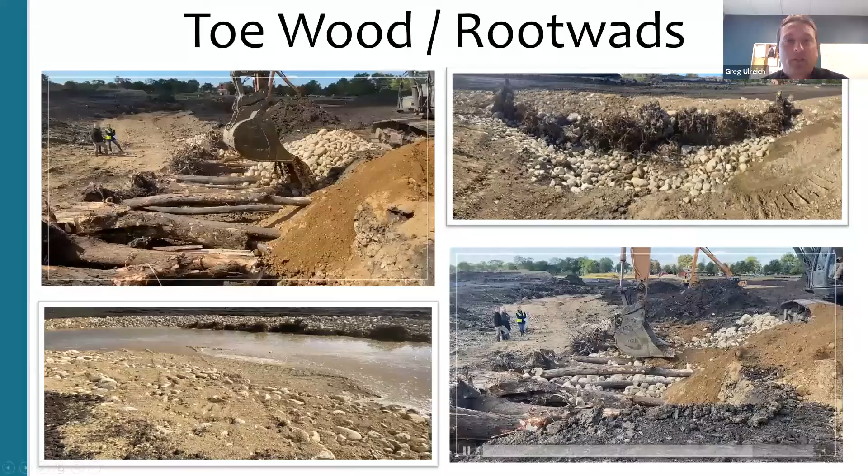Here are some pictures of the stream bed and stream bank that's getting done. They take the boulders you can see in the upper right, and then sprinkle on the finer sand material because we're going to be planting the stream bank in this rock, so we need some kind of growth medium.

The product they're using, shown in this video, is just bank run rock that they brought in. All these cobbles here are sieved out of that original bank run material.

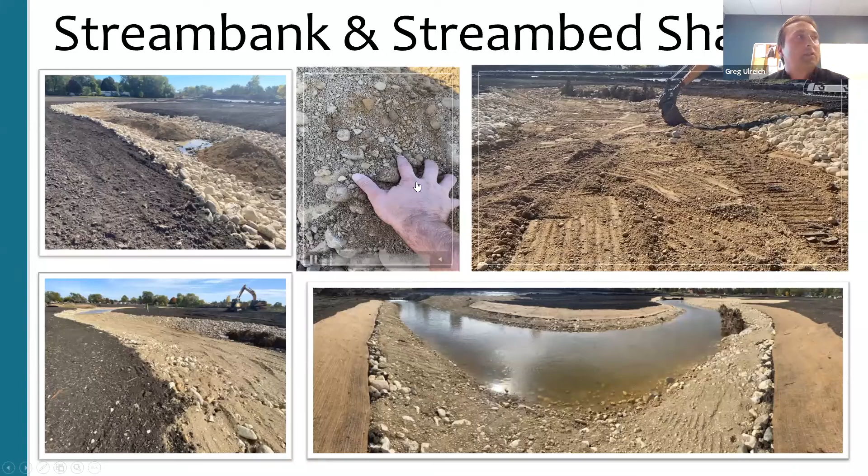It's Earth Inc. Here is when they introduced flow a couple weeks ago. There's the sheet pile that was holding everything back, and he knocked it down and slowly let the flow come in, keeping all the sediment that settled out upstream of there.

I took video here so we could track what the thalweg is doing. We were putting in a lot of meanders that didn't exist, so it was important that our thalweg went into those outer curves and underneath those root wads.

Eric Knighty said he's had lessons learned on previous projects where the meander didn't quite get the thalweg to follow the outside curve, so it would skip over a curve and hit downstream or upstream of it and erode there instead of where the stream bank had been stabilized with root wads.

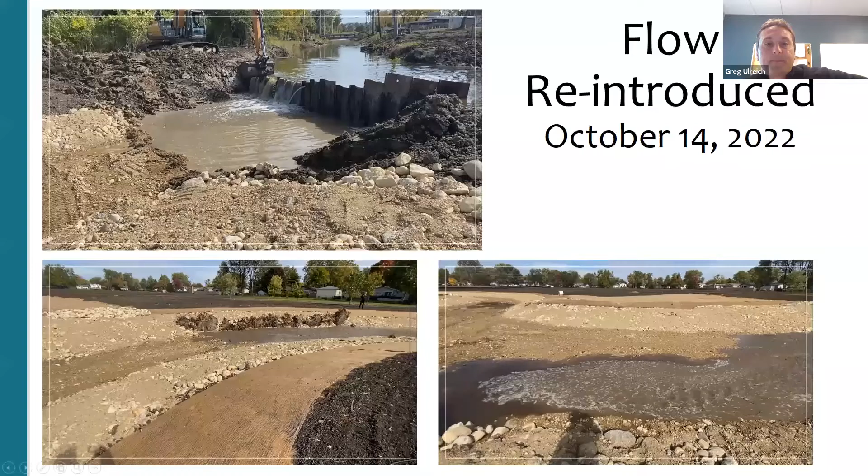So it was very important to make sure the thalweg did what we wanted. Another example, maybe a week after water was introduced: the thalweg is out here underneath the root wads, the point bar is here, and you can already see some aggradation of sediment into the point bar, with the thalweg staying more or less clean.

Here is what we call the rock substrate areas. Klein Creek was really just an old wetland that became a creek with urbanization, so we don't have a lot of fall and can't do traditional rock and riffle features. We call this the rock substrate area, where we put in a row of boulders about 6 inches above grade, giving a little pool upstream and some boulder habitat downstream. This is what it looked like as flow was first introduced.

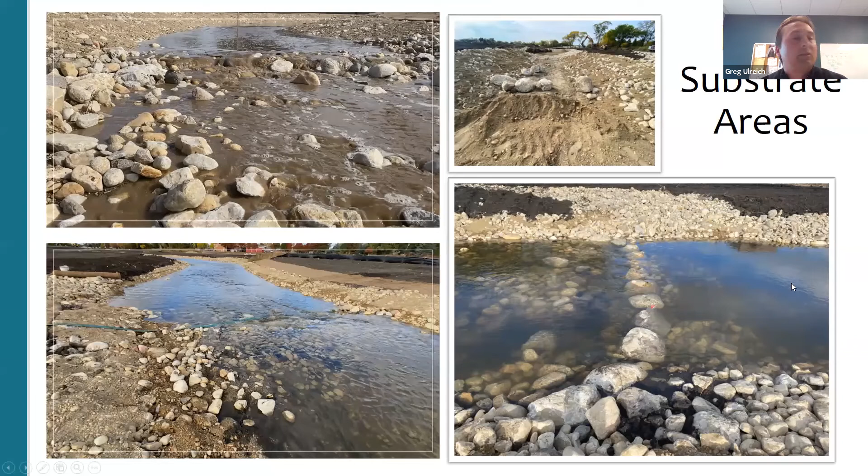Moving on, I don't think I have more pictures, but here are our stream barbs. We only have 4 in this stretch, but these are fairly large boulders that create a low flow area and push the thalweg out to the middle of the stream on this curve and into the Conn Road bridge underpass.

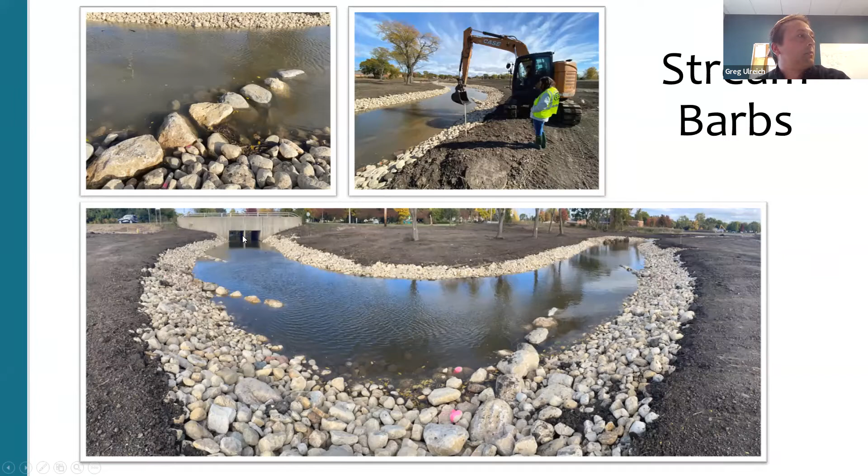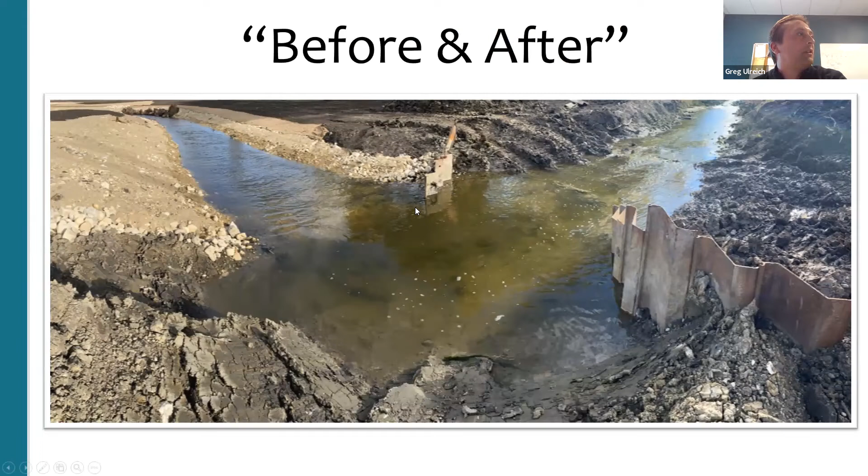And with that, happy Halloween, and a couple pictures of my nightmares, which are kids throwing the rocks that we engineered so carefully. That is my kid, so it's okay.

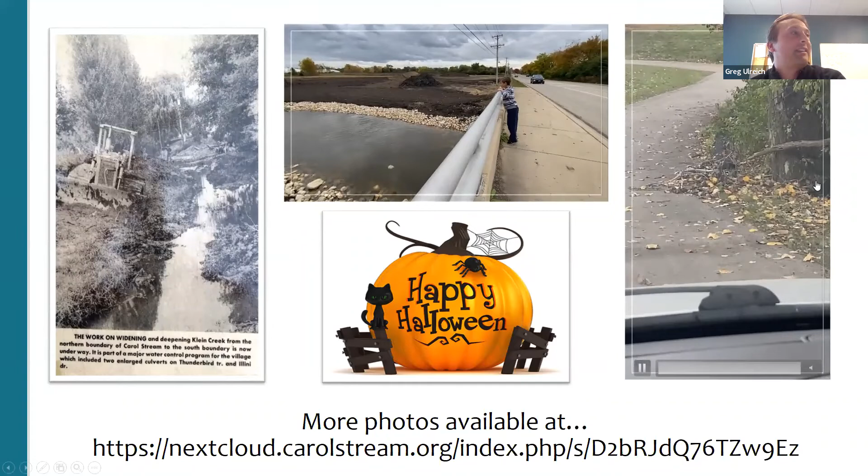A black cat that I had to cross, and then a newspaper article on the streambank widening and how they did it in the past. That project failed — they were trying to bulldoze with the water still in the creek, and it was a complete failure. That's why we're back several decades later.

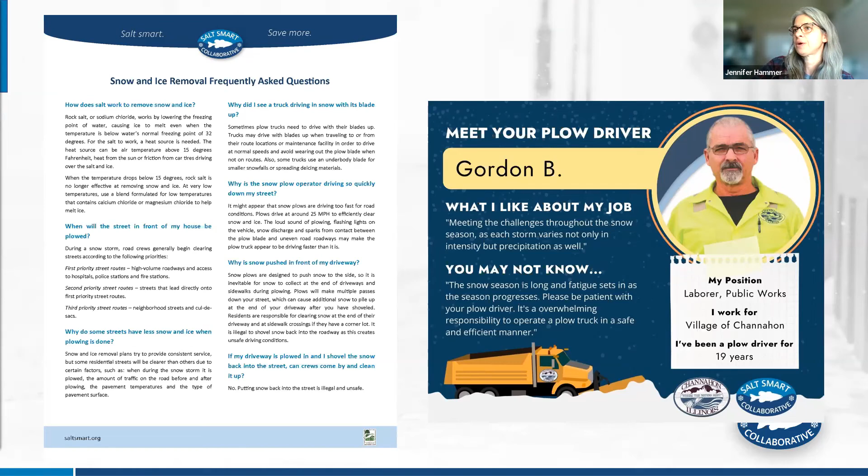One last plug for our Salt Smart Certified program. We received a 319 grant to put together an Illinois-based training and certification program, building on work started through the Sensible Salting Committee, which Stephen participated on and is also on our steering committee for this project. We'll have a brand new manual and training program available in 2023, geared towards private contractors and small sites like park districts, libraries, and school districts that do their own parking lots and sidewalk work. That's all available at the saltsmart.org website.

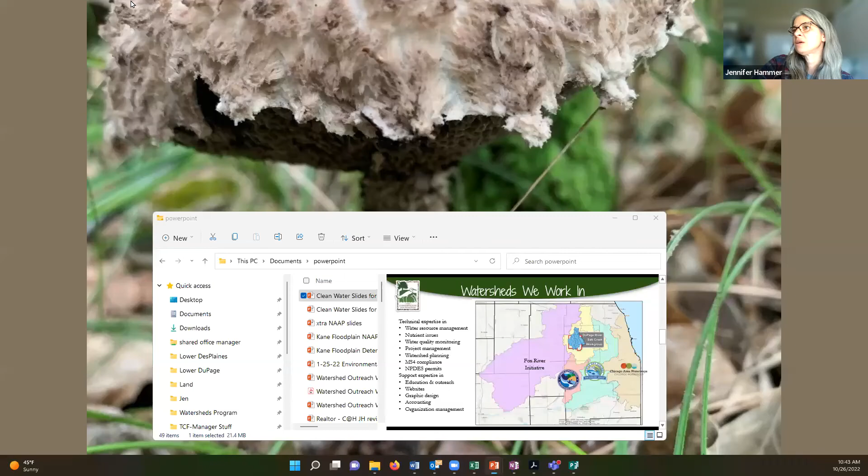Another item on chlorides worth mentioning: as you know, we've been working with three of our members, Itasca, Wood Dale, and Carol Stream. Thanks again to their staff for continuing to collect the tailings from their street sweeping programs. What we're trying to do is document how much chloride they're capturing through street sweeping, giving an approximation to the village.

There's a lot of questions that this is going to throw up, but we'll show some of that data as we now have about a year of data. We'll hopefully be able to present that at our next meeting, at least in initial form. It certainly looks like we're capturing more salt than I would have expected. We realized this was an area no one had any data on, and it seemed worth collecting.

If villages were capturing salt in this way, it should be documented. We're not exactly sure what we can do to change that - we're not necessarily going to make recommendations for street sweeping, but perhaps we should pay attention to where the street sweeping is being placed afterwards and how that's being treated, since we know chlorides don't degrade like a lot of our other pollutants.

Okay Deanna, anything on our Upper Salt Creek 319 watershed plan? We're working on the draft plan, which is actually due to the IEPA by the end of 2022. So we're working on getting that text together.

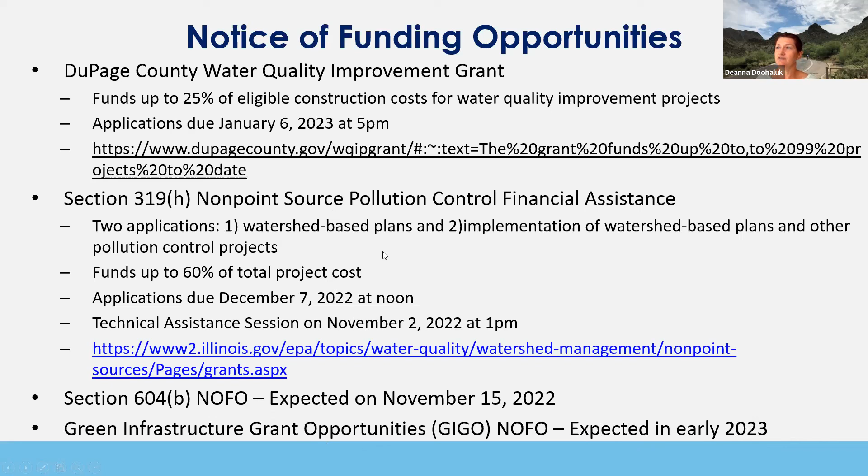Some upcoming ones to know: Section 604B is coming out again, expected mid-November. And the green infrastructure grant opportunity through IEPA is back, with a notice of funding coming sometime in early 2023. We'll keep you posted on when that's coming up, but we'll put all these links into the agenda, and if you need them, just shoot me an email and I can get them over to you. That's all I had on that, Stephen.

Thanks, Deanna. I was also neglecting to mention we sent out the invitation for the 2022 Nutrient Loss Reduction Strategy Partnership Workshop announcement. That's going to be held on November 1st, with both a virtual and an in-person component. Registration is closed, but hopefully anybody who wanted to attend already got in under that deadline. We'll be attending and will report back on anything we think folks need to know.

So Dave, I think that wraps up everything we had. Okay, and I just want to mention this is the time of year I normally send out the PDH certificates, so look for those. Nancy Sonato of our staff compiles a spreadsheet showing which meetings you've attended, and probably in the next couple weeks I'll have that to each of you.

This meeting, as well as the others, has been submitted to the IEPA for CEUs for wastewater, and it has been approved. We'll get that number out following. I believe that's the case for all our meetings in the past year, Deanna? I believe so, everyone we've asked for approval has been approved. Okay, so you'll get our certificate and can keep your records that they've also been approved by the IEPA. Nancy will follow up with a mailing to everyone about the number they need to use to get their CEUs recognized.